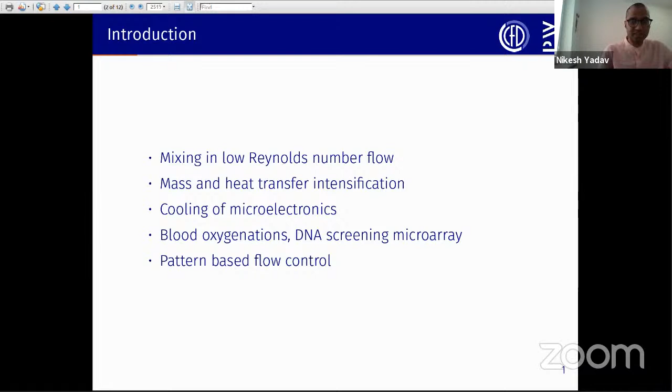So mixing in fluid is a two-stage process. First we do mechanical stirring, and then the intermaterial diffusion starts to play a role. We do something similar while mixing milk into our daily coffee. So what we do is stretch the interface of milk by stirring. So what happens is that when we stretch the interface of milk, more milk gets in contact with the raw coffee.

So that helps the diffusion to work faster, right? Somehow it assists the diffusion to work faster by stirring. Stirring produces small scales during the stretching, and that can be rapidly smoothed by diffusion.

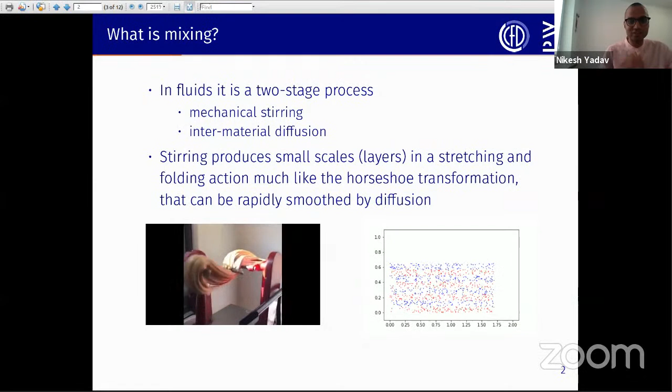Okay, so in the bottom left you can see the candy making machine. What the candy making machine is doing is stretching and folding continuously. Something similar we do while making our pizza dough. We stretch, fold, to have a delicious candy, because for taste we like to have homogenized things, right? So that's how delicious candies are being made.

So mixing. The most common approach for mixing is flow turbulization. Turbulization introduces a diverse range of length and time scales in the flow, which results in rapid mixing. But turbulization is effective, yet difficult to sustain, control, and predict. Hence, mixing based on turbulization is also difficult to sustain and predict.

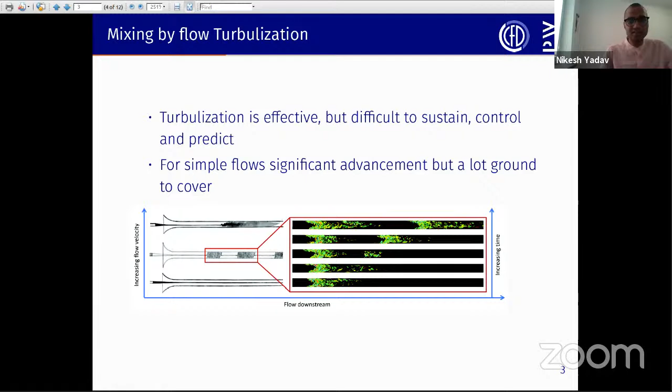For simple flows in controlled setups, we have significant advancement in their control, but a lot of ground needs to be covered to implement them. The major problem with turbulization is in cases where we are limited by the structural strength of the device. If our device is very sensitive, for example, to some biofluids, we cannot use turbulization because it's going to introduce additional stress and vibration on the system.

So then comes the concept of chaotic advection, which was put forward by Aref in 1984. What he proposed is that steady flows in 3 dimensions could also result in chaotic particle trajectories. This means that if we have some chaos in our advection field by introduction of baffles, obstacles, and bends, we can still have mixing.

What these baffles, obstacles, and bends do is, if two particles are very close by and they move through such things, they become apart in some time t. So they become spread in some time t, and we can say they are spread.

The major disadvantage with this is that introduction of baffles and obstacles causes additional resistance, and when we go to a smaller scale, we need to reduce resistance as much as possible, because pumping becomes difficult at smaller scales. This is because the surface forces or viscous dissipation eat any inertial effect. So that's the issue with this.

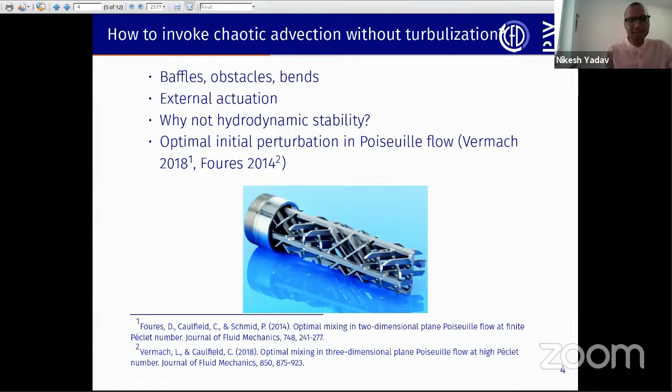But still, this technique is widely used in microfluidic applications. So we have something novel than this.

Our goal is to use naturally occurring hydrodynamic instability to cause complex flow topology without causing much hydraulic drag. Fluid instabilities are all around us, appear at all length and time scales, and are caused by a multitude of phenomena, having a great impact on technologies and environment. Our goal is to use some surface patterns, some surface boundary modification, which can excite this hydrodynamic instability or fluid instability to create complex advection patterns that increase the mixing.

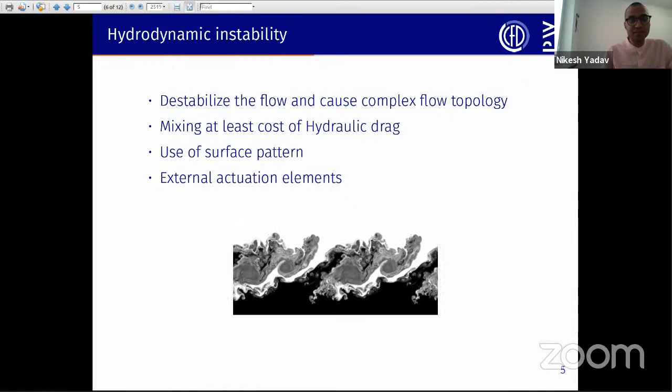The corrugations are characterized by S, which is the corrugation amplitude, L, the span-wise length of this channel, and N, the number of corrugations. The first step we undertook is to find out the geometric parameters for this channel which have the least hydraulic resistance. So how do we proceed with that?

What we do is take the same pressure gradient that is used in this plane channel, and we know the flow rate for this case. We force the flow using the same pressure gradient, and then we compare the flow rates of this geometry. If we have more flow rate, we know that this has less hydraulic drag.

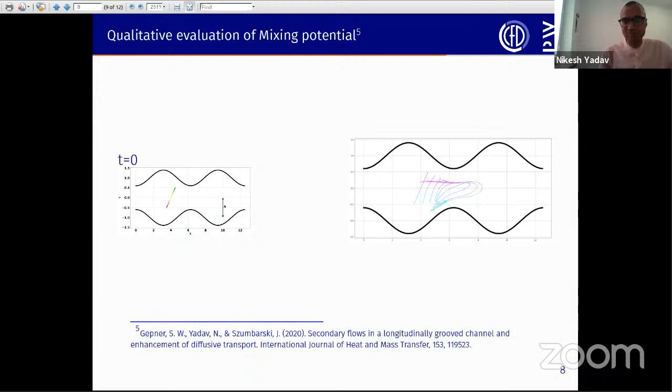This shows the qualitative mixing. We also did quantitative analysis and many other things, but this is the one more nice to show.

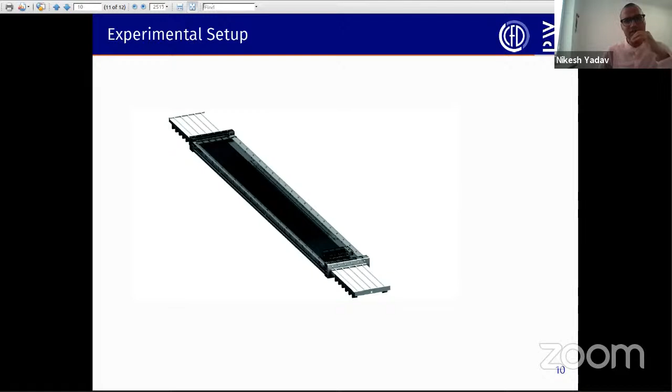Other than that, what we're interested in is that in this analysis or study, we took the disturbance having arbitrary disturbance size, so they are arbitrarily small. But in our recent work, we also found the optimal disturbance shape or size. It's more difficult to test experimentally, but we are working on it.

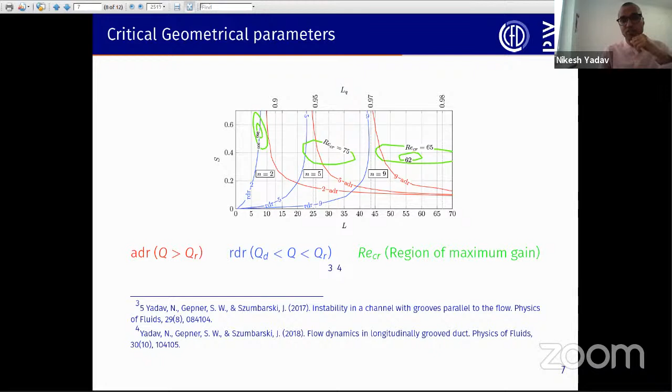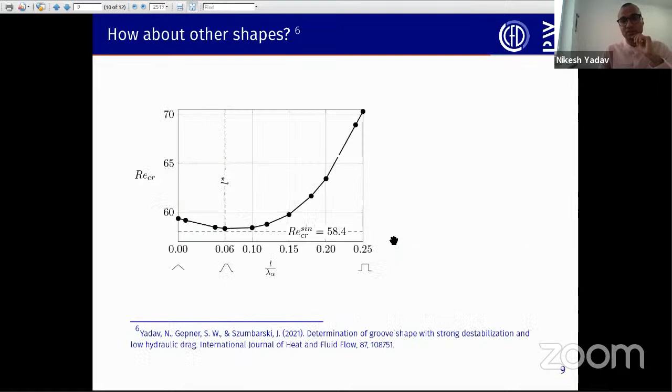Thirdly, what we recently got interested in is creating some external actuation mechanism which mimics this instability. So this is this thing. That's all from me. So this is all.

We need to do a lot of computation which are locally done on our cluster units. And this research is funded by the National Science Center through a Preludium grant.

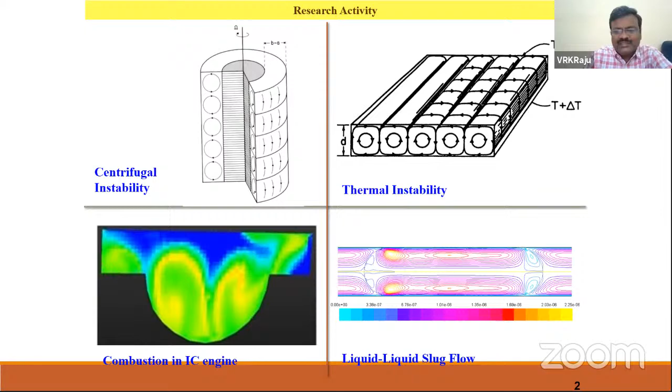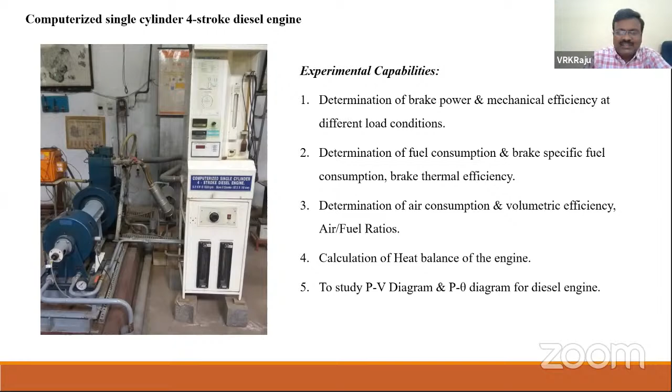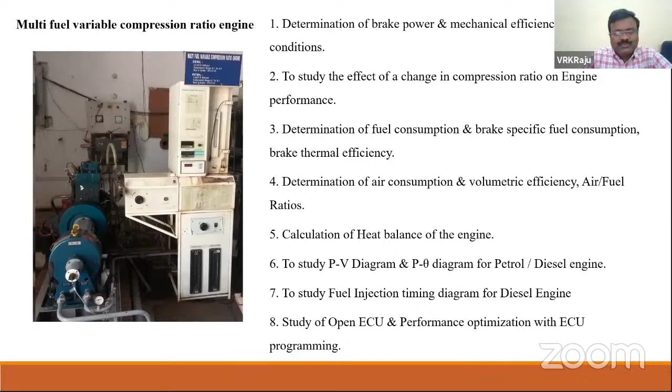This is one of the setups which we are using for our experiment. This is a 4-stroke diesel engine, computerized single cylinder 4-stroke diesel engine. This is one more engine which is a multi-fuel variable compression ratio engine. Here the bulk of our work is going on because of this variable compression ratio. Another engine is a 4-cylinder automotive CRDI, variable geometry turbocharger engine.

As of now, in this particular alternative fuels with combustion area, we have a project on simulation and experimental evaluation of dual fuel HCCI engine using reactivity fuels. It's a collaborative Indo-Thailand project, with 3 investigators from our place and 2 investigators from theirs.

In line with this, we have a simulation facility for combustion modeling at our place, using Converge software along with a post-processing software called EnSight. These are the tools we are using for our research work.

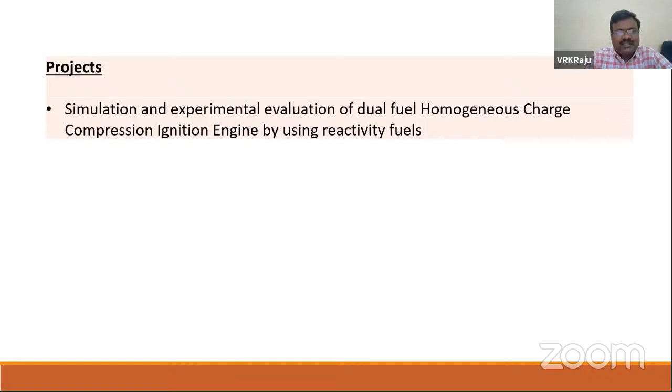Now coming to the topic concerned, the first one is thermal instability — onset of Rayleigh-Bénard convection with periodic boundary temperatures. When we say Rayleigh-Bénard convection, this is the classical Rayleigh-Bénard problem where you have horizontal plates extended to infinity.

Between the two horizontal plates, the fluid is confined, and the lower plate is given a heating effect. Because of that, we get an instability once the temperature difference goes beyond a certain level, and that's where convection cells come into picture. The magnitude of temperature difference that gives rise to convection cells is called the critical Rayleigh number.

But in this configuration, rather than giving a constant temperature at the walls, we have given a modulated temperature — modulation with respect to time. The top surface is given a temperature of C delta cos sigma t, where C is a constant tunable by the user, whereas the bottom wall is given 1 plus delta cos sigma t. When C equals 0, the top plate is not given any modulated temperature.

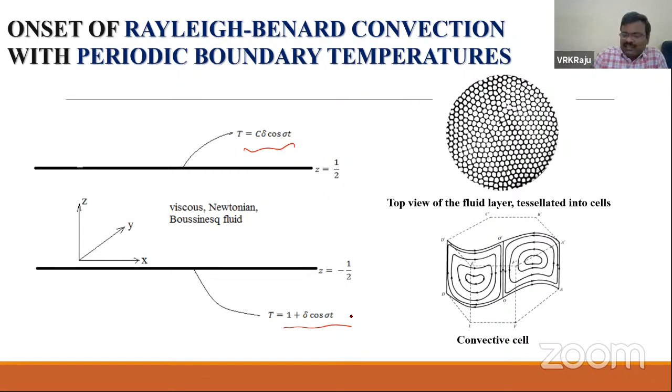These kinds of studies are generally carried out in order to either delay the transition from laminar to turbulent at the critical point, or advance it. To solve this, we tried two ways: one is linear stability analysis, and another is weakly nonlinear analysis. In both cases, the work is carried out analytically.

This graph shows results with respect to weakly nonlinear stability analysis. When C equals -1 and C equals 0 — that is, anti-phase or only the lower plate modulated — we get subcritical instability, meaning the magnitude of the critical Rayleigh number is less than that corresponding to linear stability theory. So we get subcritical instability for both these cases, where either both plates are modulated in anti-phase, or only the bottom plate is modulated.

Whereas when both plates are modulated in phase, we get supercritical stability, meaning the flow achieves a new form of laminar flow after a certain time. So these are the results with respect to the weakly nonlinear theory.

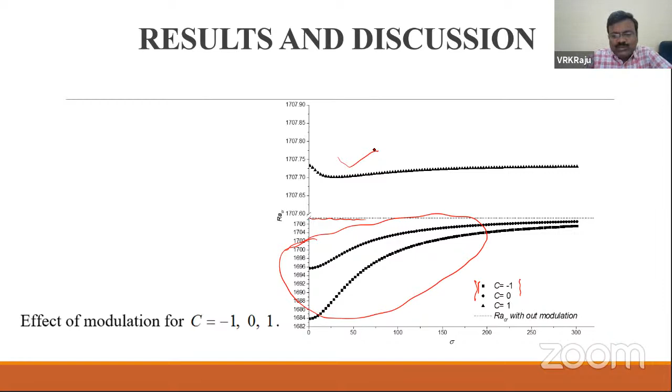When we compare these results with those of linear theory — these are results for linear theory for different values of Prandtl number, whereas these are results for weakly nonlinear theory — it shows that the weakly nonlinear theory gives a subcritical instability situation. Apart from that, we also have an instability independent of Prandtl number in the case of weakly nonlinear theory.

In the weakly nonlinear theory, the critical Rayleigh number increases from 1684 towards the linear theory magnitude as sigma tends to infinity. The same thing happens for C equal to 0, where only the lower plate is modulated — here too we get subcritical instability. Both the anti-phase case and the lower-plate-only modulation case show similar trends: they start with a lower value, and as sigma increases towards infinity, they approach the linear stability critical Rayleigh number asymptotically.

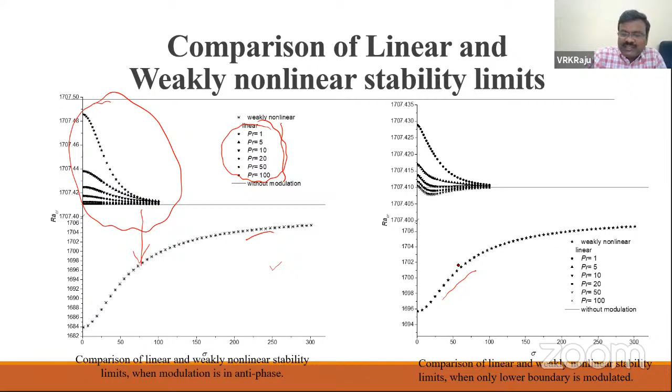But the case is something different when you go for a situation where both the plates are modulated in phase. If both the plates are modulated in phase, in such cases, we find that we are getting a supercritical stability condition. That means your critical Rayleigh number is higher than the linear value.

That shows that your flow will eventually end up with a new form of laminar flow after a certain time, beyond that critical value of 1707 in case of your linear theory. So these are some of the findings with respect to your Rayleigh-Benard convection with modulated temperature.

Where we have carried out both linear analysis and nonlinear analysis. We observed that for two of the cases, the weakly nonlinear analysis confirms subcritical instability, whereas for the case where both the plates are modulated in phase, we are getting a supercritical stability condition.

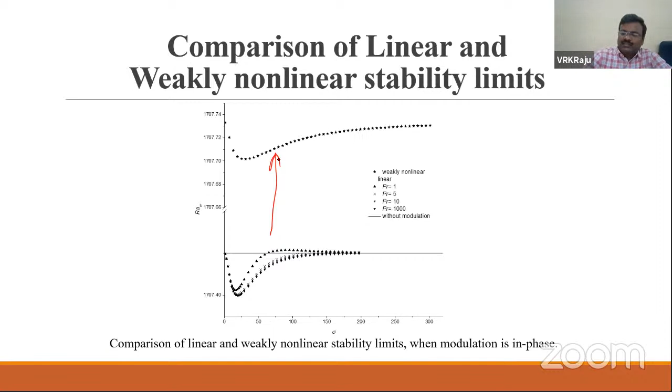Coming to the other part of our research, which is in line with alternative fuels. This sort of thing comes into picture because of the necessity of fuels which can cater to the needs of the society, and since fossil fuels are depleting day by day, everyone is trying for alternatives, and most people find that biofuels are good substitutes for fossil fuels.

So in line with that, most people try to characterize the fuels, and they found out that the calorific values may be on the lower side compared to fossil fuels, but still this can be utilized in the existing engines without sacrificing that much performance. So that's where this sort of thing came into picture.

When we say biofuels, most of the time the biofuels are pure vegetable oils, or they can be from animal fats. So depending upon that, they may be edible or non-edible.

Since in our place our consumption is on the higher side with respect to edible oils, there is some restriction. So most people are trying with non-edible oils such as jatropha, neem oil, castor oil, and trying to have a good alternative for existing fossil fuels.

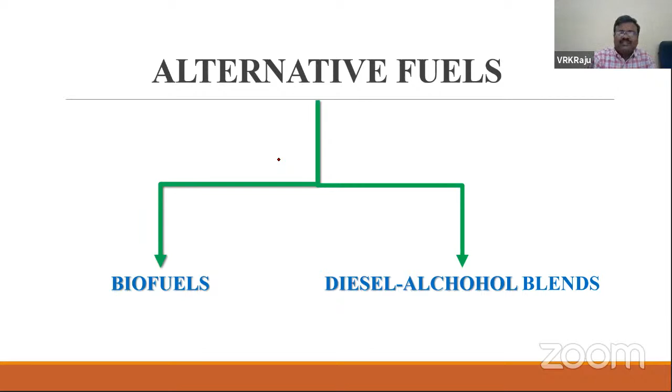So in order to carry out research in this particular line using alternative fuels, generally we do this with the existing engine, and we try to see how the performance varies compared to traditional diesel fuel. Then we carry out most of the performance analysis using a simulation.

Once we try to come up with a better solution, that is an optimized solution with respect to performance as well as stringent emission norms, we can suggest that if we use a particular fuel, what will be the operating parameters so that we can get a better performance as well as emission norms satisfied as per the government of that particular place where you are using this.

So this is a particular setup, which is a variable compression engine. In this particular case, we can run this engine either with diesel as the working fuel or petrol. Both options are available with a single engine. We have to change only the cylinder head, and we can control the compression ratio.

We can control the start of injection. So these are some of the facilities available with the existing engine, where we can carry out our operation, and the output will be given in terms of P-theta, that is pressure versus crank angle, temperature versus crank angle, through a particular software connected to a system.

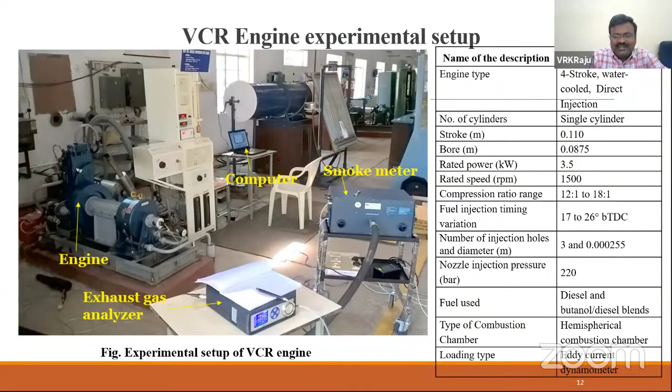Once we get the data from the engine, we compare the data with the numerical simulation for the same engine. Once we validate our numerical model, then we carry out the analysis for the other parameters for which we want to optimize.

So this shows the variation of pressure with respect to crank angle, and the orange line shows the variation of pressure with respect to crank angle for a baseline engine. That means the engine which is predefined at a particular setup. Against that, this is the curve.

But once we go for an optimized value, because the objective is to run the same engine but now with a biodiesel, the biodiesel we are using in this case is PB20, that means 20% by volume biodiesel.

Here in this case, we have used Pongamia oil, 80% by volume, as the diesel as such. With respect to that, the baseline data shows a curve of this nature, the orange color curve for the P-theta diagram.

When we went with the optimized value, which gives the optimum performance with respect to output as well as emission norms, we found that the peak pressure is increased and moves towards the left side. That means the peak pressure is obtained around or before top dead center, and the temperature in the optimized case is lower compared to the baseline. That's where we get the advantage with respect to emissions, because the in-cylinder temperature is lower, ensuring less NOx emission, which is our objective to satisfy stringent emission norms.

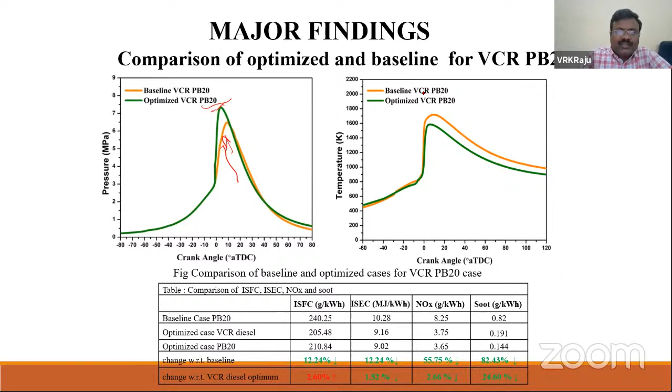For unburned hydrocarbons, in the optimized VCR engine, that is variable compression ratio engine with Pongamia as the biodiesel, almost all the hydrocarbons are utilized. That means complete combustion is ensured, so the particulate matter coming from this emission will be on the lower side. The same trend is seen for CO, carbon monoxide, also on the lower side compared to the baseline.

So what we tried is to get an optimized value. For that, we carried out our optimized calculation using the software available with us, the combustion software.

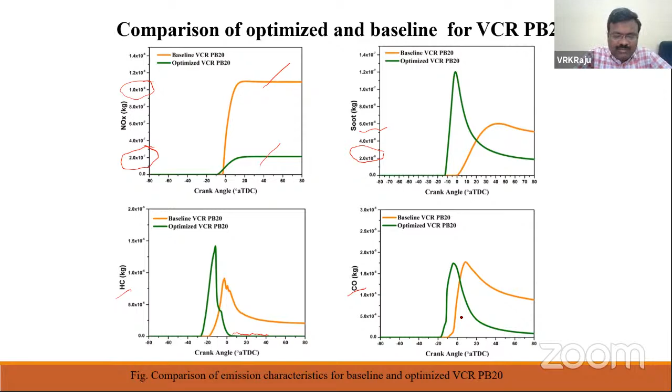That means you don't have any pockets of rich fuel or lean fuel. If you have rich fuel, you get particulate matters. If you have lean fuel, the temperature increases and you get a NOx condition. So the target is to minimize the variation, ensuring uniform distribution throughout the domain.

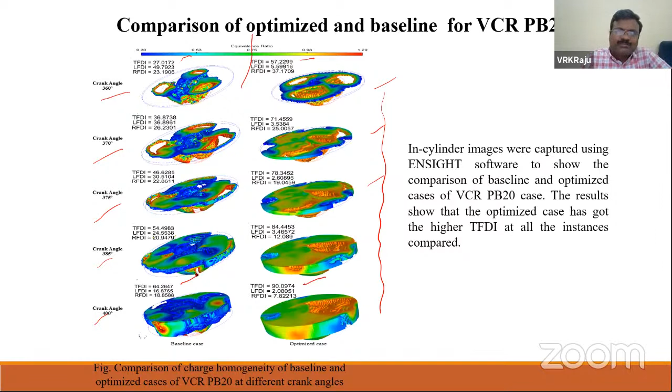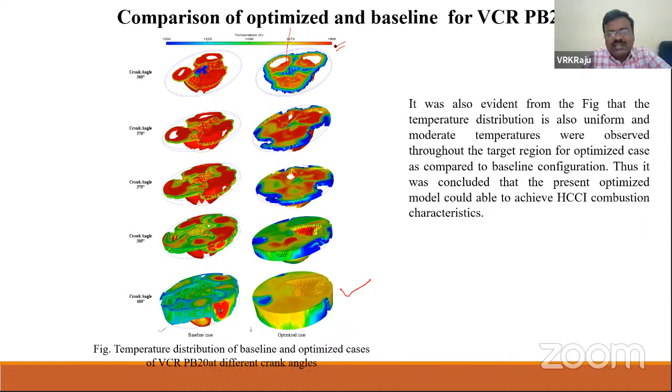This is the comparison of your temperature distribution, because if your temperature is on a higher side, that shows the NOx emission will be on a higher side. So the target is always that the temperature should be as low as possible. This confirms from the figure that for the optimized case, the temperature is around 1675, whereas for this case, the red color zones have a temperature around 1900 Kelvin. This shows that NOx emissions are also lower with this particular engine. In line with that, we also worked with some alcohol-based fuel blends.

In case of alcohol-based fuel blends, the advantage is that alcohols have a higher value of latent heat, so most of the time we get the advantage of low cylinder temperature. These alcohols can also be derived from sugarcane bagasse, corn stalks, or rice straw. That is one of the advantages of using these alcohols.

But in alcohols, we have a variety of chains. If you have a lower chain, which are mostly used as a substitute for traditional fuel, that is methanol or ethanol, they are widely used as substitutes for IC engine fuels, but they have some demerits. Lower chain alcohols have lower energy density and inferior cetane number compared to diesel. So that is one disadvantage with lower chain alcohols.

So we tried higher chain alcohol like butanol. The results presented here are in line with butanol as our substitute fuel, with diesel as the primary fuel. In this problem, we tried different combinations of butanol percentage in the blend.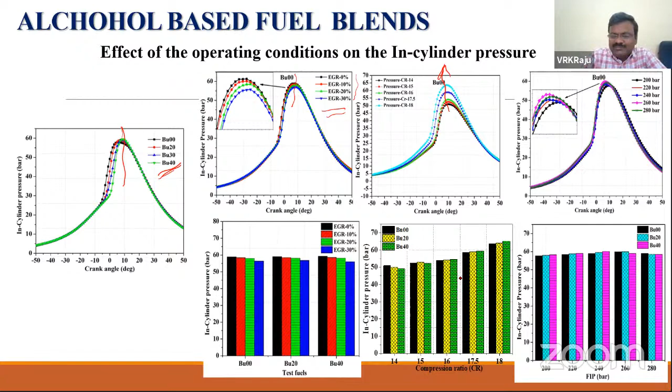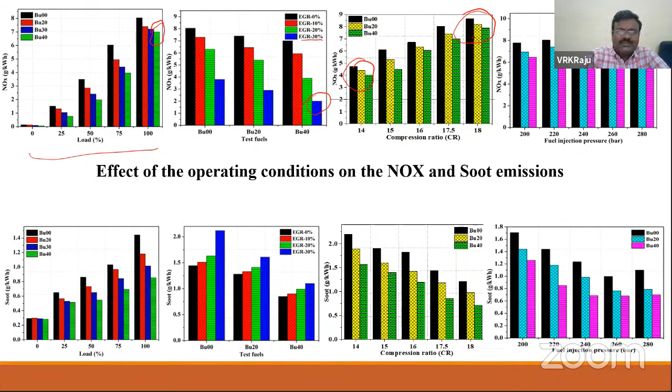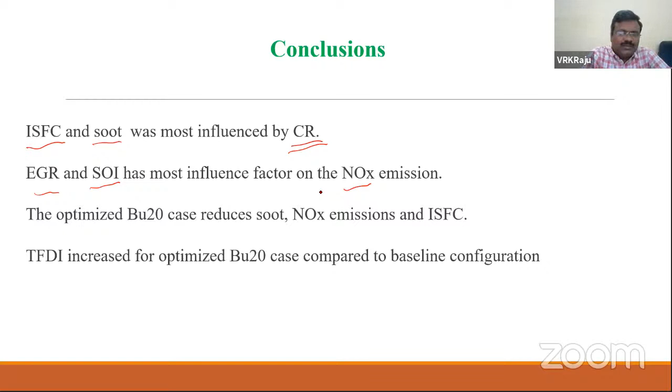EGR and SOI, that is start of injection, have the most influence on NOx emission. That has to be controlled and tuned properly. The optimized butanol 20 case reduces soot, NOx, as well as ISFC. That is the objective, to reduce all these three things - with respect to emission and performance. So if we can reduce all three, that will be good for us. So we tried for that.

So this TFDI increase for the optimized BU20 case compared with the baseline configuration further confirms that we are trying to achieve some sort of HCCI. I won't say we are getting HCCI combustion, but we are trying to get towards HCCI combustion using this sort of optimized technique. So in the near future, with these existing engines, with alternative fuels, with some modification to operating parameters, we can achieve the required emission norms as well as performance.

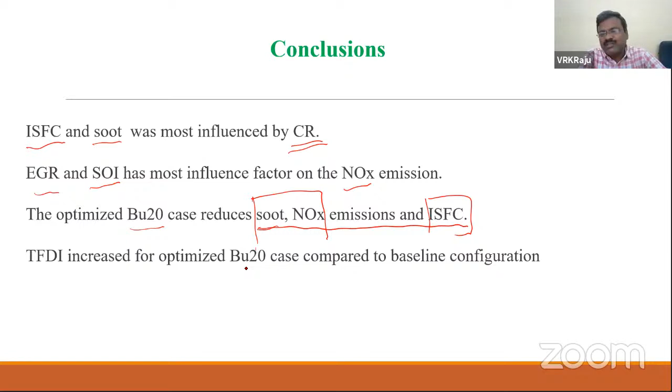So that is something about my research at this particular place. Thanks for your time. If anything.